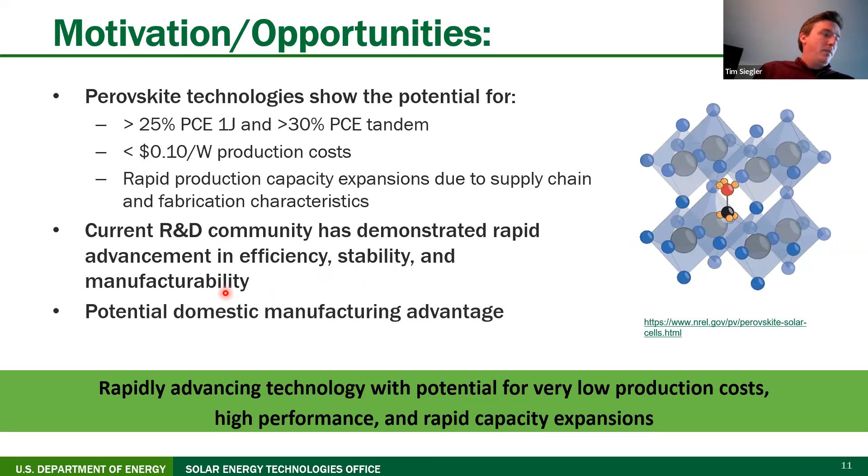There has been a lot of work to drive up efficiency to very high levels and demonstrate a high headspace there. There's been a lot of good work showing that while stability is a concern, there's a lot of levers you can pull to enhance stability and to enable high throughput manufacturing with a potential domestic manufacturing advantage.

SETO observes that there are 3 major categories of perovskite technologies that are currently being explored for commercialization in the startup communities and in various for-profits. A single junction, which is a standard PV with a single perovskite absorber, which has potential for the lowest dollar per watt costs of any of these 3, and a current record of, again, 25 and some change on less than 1/10 of 1 square centimeter. We'll talk about these targets later, but DOE has identified a target of about 18% efficiency on 500 square centimeters.

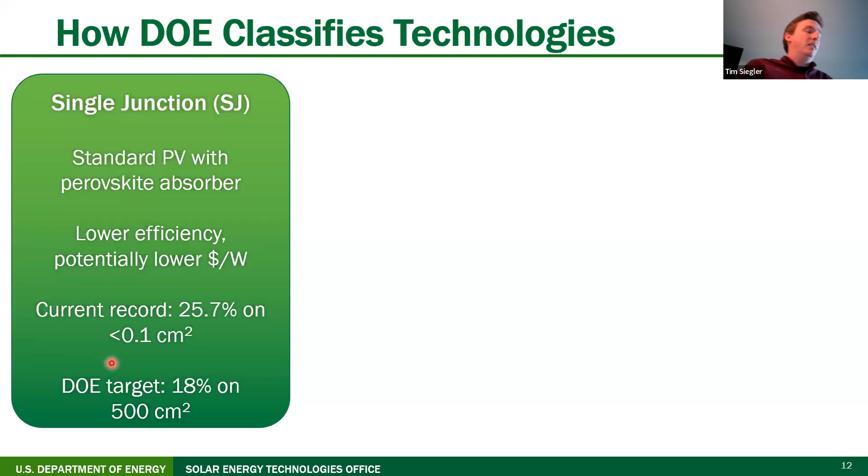Perovskite tandems allow for higher efficiency with the same sort of capex advantages that a single junction device would impose. However, because you are doubling up the number of absorber layers and have to double much of your capex equipment, we have a higher target of 24% on 500 square centimeters, with the current record of about 28% reported in Martin Green's tables for less than 1/10 of 1 centimeter squared.

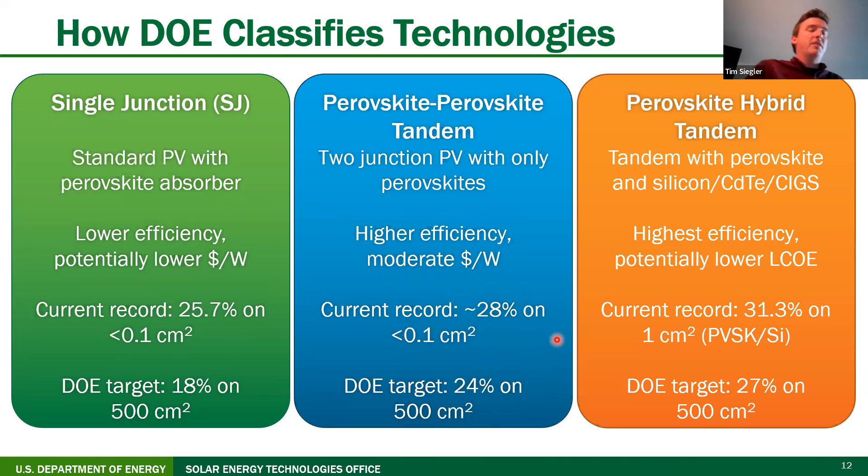And then perovskite hybrid tandems are tandems that employ perovskites in concert with silicon, CdTe, or CIGS, which have the potential for the highest efficiency, and currently exhibit the highest record efficiency of over 31% on a larger 1 square centimeter perovskite silicon tandem cell. And DOE has a target of 27% on 500 square centimeters.

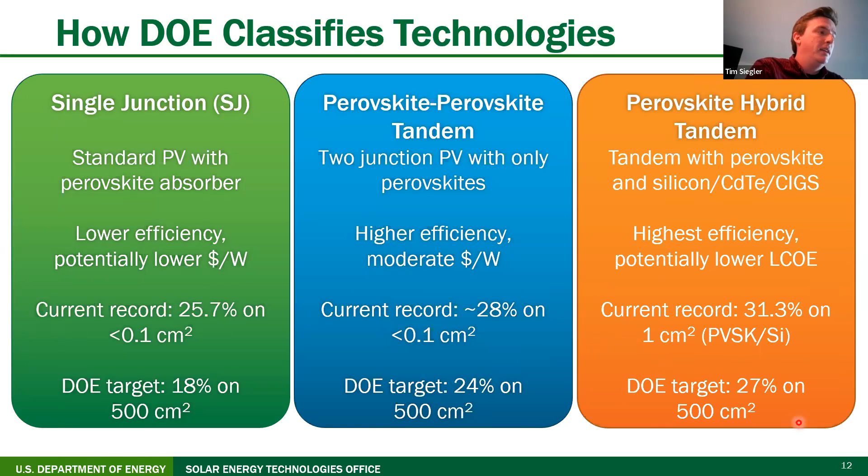And so to discuss what our office thinks about perovskites, we published, again, a perspective letter in ACS Energy Letters. And before we get into the actual details, while there were a lot of things that could be perceived as takeaways for the startup community and for-profits, publishing in an academic journal was intentional, so that the large community of applied researchers, and obviously fundamental research is very important and something that we value, but there's a lot of applied researchers who want the technologies, solutions, or science they're working on to be helpful to decarbonizing the US economy.

And so attempting to create some high-level alignment among academic researchers on these topic areas, and clarifying which questions, at least that DOE perceives, are actually gating for deployment were some of the higher level goals of this paper, as well as some stakeholder engagement. Perhaps folks who know SETO very well might not have gotten much new information from the paper itself, but there is a larger community beyond the DOE bubble that we wanted to reach, people that we aren't talking to every quarter in quarterly update meetings, who still could contribute quite a bit to perovskite technologies.

We also valued the feedback from the peer review process. And I think one thing that we didn't anticipate is how much communication, feedback and dialogue we were able to generate. That's been very productive, very useful, and something that we very highly value as a result of this paper.

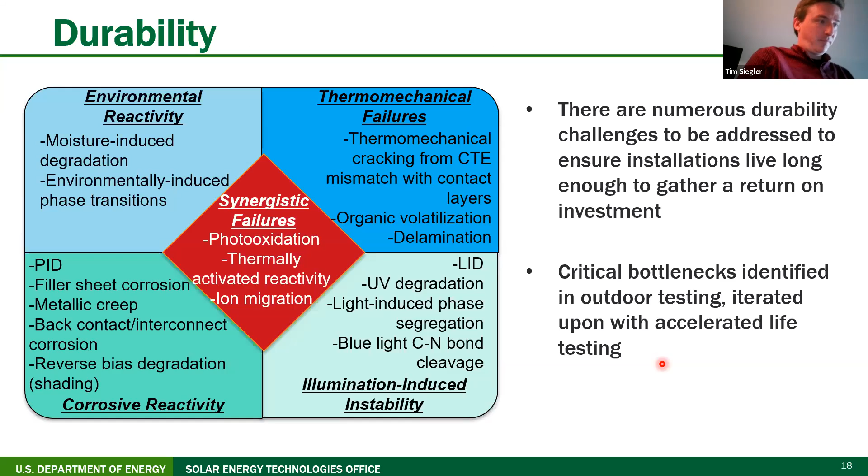As far as efficiency is concerned, I'm working to rebrand efficiency internally as efficiency at scale. I'm speaking as myself here, not as the DOE, but if I don't see that 25.7% record on 0.1 square centimeters broken ever again, I think I'm okay. It's more important that we get to near 25% on larger area devices.

And to kind of level set for the community, silicon cells have a standard cell size of 274. That's what an M6 cell is, if I'm remembering. It's either 274 or 276 square centimeters, and they are actually moving to larger formats. We will see if the market bears that, but nonetheless, this is kind of the orders of magnitude increase in cell size that we're looking at, not to mention modules as well.

And when we look at the cell-to-module efficiency gap, there are obviously scientific problems that may or may not be contributing to this gap in efficiency between small and large area devices. Maybe some of the quote unquote benign defects are actually becoming more apparent at larger area. Perhaps sheet resistances of, let's say, metal transparent conductive oxides that are tolerated at very small area become more problematic when you go to larger area devices and cause a lot of series resistance.

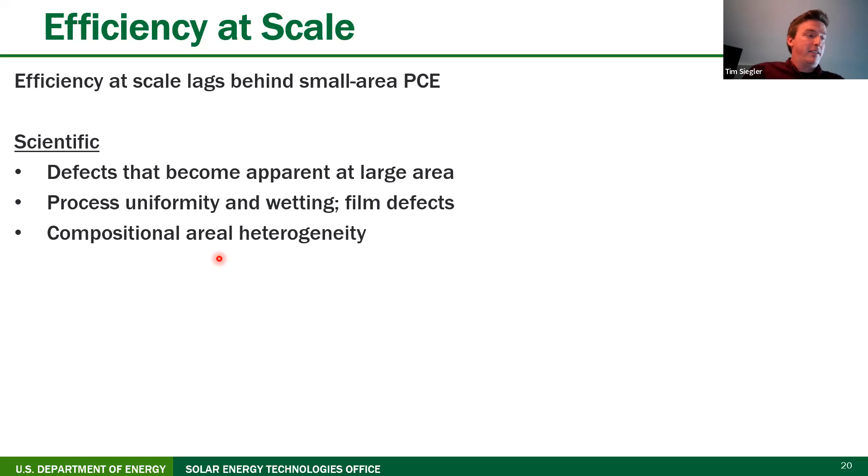And then potential compositional heterogeneity as well. Areal heterogeneity, which means in the XY plane, or at various length scales. It could be millimeter to meter level heterogeneity due to variations in just being suboptimal in your deposition, or it could be on the micron scale or even on the nano scale, depending on whether there's phase segregation, either photo-induced or inherent phase segregation in your perovskite compositions.

But I think it'd be remiss to not discuss some of the systemic issues. A lot of these records are optimized on non-scalable techniques. Even if you want to try to make the argument that spin coating has scalability potential, the way that you do solvent anti-solvent engineering in a lab is probably not going to be useful on substrates that are larger than, let's say, 2 inch by 2 inch, maybe being generous 5 inch by 5 inch, but probably 2 inch by 2 inch is about as large as you can get, doing specific anti-solvent dripping in the center of a spinning sample and getting the fluid dynamics such that it perfectly and consistently makes uniform thin films.

This is something that's being solved in real time. And so this is not as big of an issue as maybe it would be 2-3 years ago. But academic breakthroughs often aren't tested on larger areas, or perhaps 1 square centimeter is defined as a larger area. And again, thinking about the competition, the other technologies in this space, CdTe and silicon, they're in the 100s of square centimeters cell size. And so the definition of large maybe needs to be explored as well.

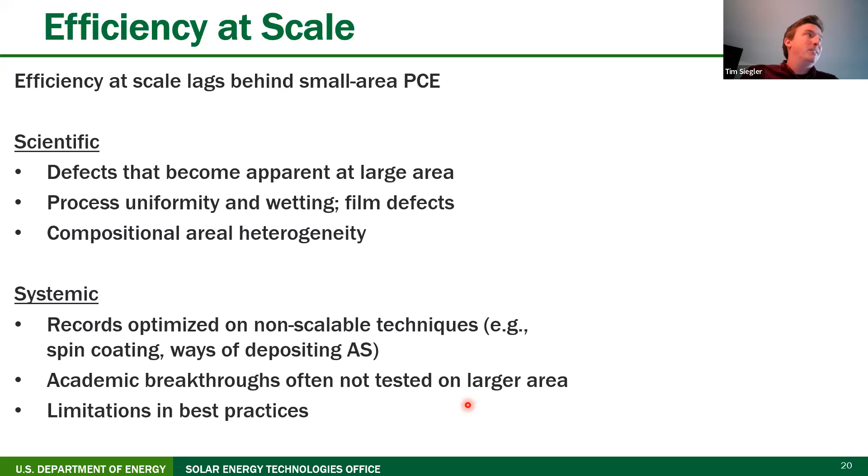And then limitations in best practices as well. Now, this is a very broad catch-all, but I want to just take one example that maybe could be used by academic communities and folks making small area samples to really help test on larger areas. Let's take a standard pinout that many are familiar with, take scale bars such that one of these squares is 0.1 square centimeters in size, and assume a perfect mask where you're just exactly masking the active area with nothing around, like micron level precision.

By doing very small adjustments to your shadow mask and keeping all the pins in the exact same place so you don't have to change anything in your testing equipment, you could utilize this large exclusion zone that's present around all of your devices, and sample much more of your area, right? You or your grad students have done the work to make these films. Let's utilize all of them, and more than double the active area just from a very simple switch without changing any of the processing at all.

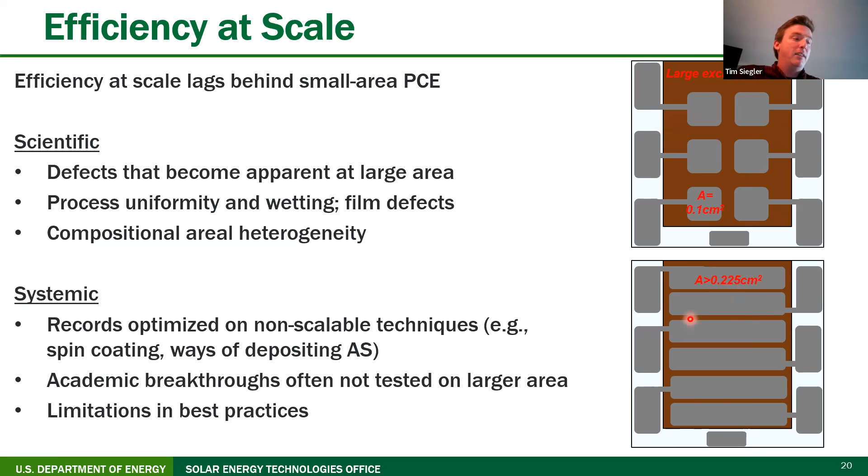Moving on to manufacturing, obviously the processes themselves are important in optimizing those, but there's also a lot of manufacturing considerations related to quality control, process uniformity, repeatability, throughput, making sure you have inline metrology, and doing supply chain development as well. I'm going to focus on process control and process insensitivity, which is, I think, very important, right? Because to enable the low costs of perovskite manufacturing that would help with SETO's ultimate goals, low capex is the promise that perovskites may be able to achieve one day. But tighter control windows add cost. And so process insensitivity helps to maintain headspace for cheaper manufacturing of perovskites.

And I think to call out a number of different things that may require process insensitivity. Precursor ratios and concentrations, whether that's in a solid or an ink, are important. I'm thinking of, I believe it was Jana Vanzov's work on lead acetate to methylammonium iodide ratios for that specific anti-solvent-free composition, and how tiny fluctuations there yielded dramatic differences in PCE values. And so processes that require such tight controls might have a very high failure rate for modules and not be particularly attractive for high volume manufacturing.

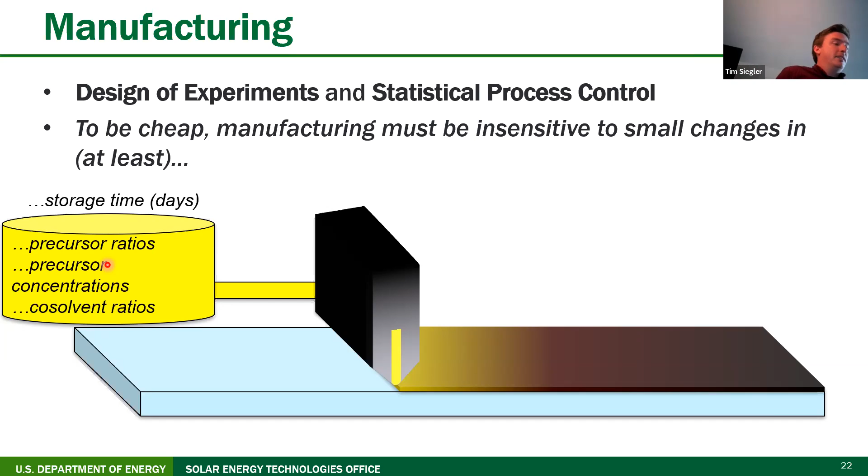Storage time on the order of days in case there's a line stoppage, or even just trying to mix or get a lot of material prepared at one time. If you have to continually throw away inks or solids and replace them, that's a yield loss in and of itself. That has nothing to do with the deposition. So being able to store your materials for a few days is important to make sure that you keep yields high and by extension costs low.

Similarly, handling time in the course of hours, so you don't have to continually flush out your lines or throw away material when, again, there's a line stoppage or something unexpected happens, which would impact yield as well and create extra hassle and time on the manufacturing line as you handle that specific fire and need more time to do that. Ambient temperature and environmental conditions as well.

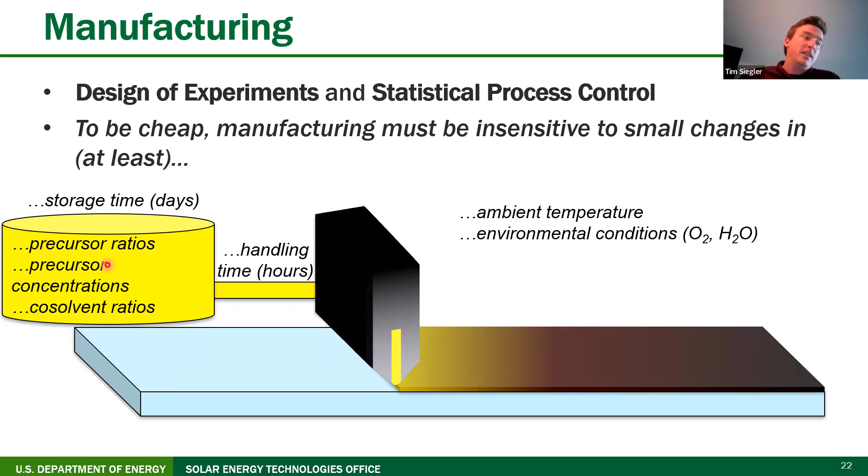Being able to produce solar cells with the same efficiency on the hottest, most humid day of the summer versus the coldest day of winter, and getting the same performance regardless. That's obviously very important when you're trying to do gigawatts of throughput every single year. And then various different deposition parameters as well: feed or vapor pressure, contact layer heterogeneities, line speed, and substrate temperature.

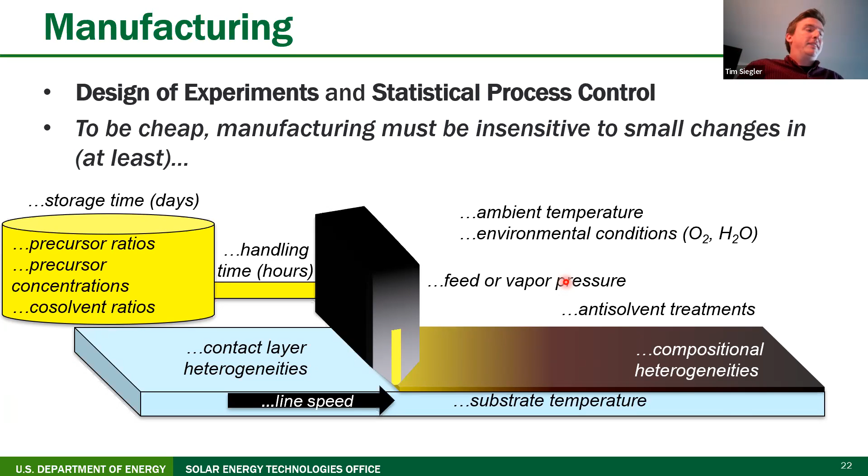Being able to employ design of experiments and statistical process control to verify small changes in all of these is very, very important, so that there's statistical power behind claims of process sensitivity or insensitivity. And finally, anti-solvent treatments and compositional heterogeneities downline. If there's tolerance to that, that helps with yield and performance as well.

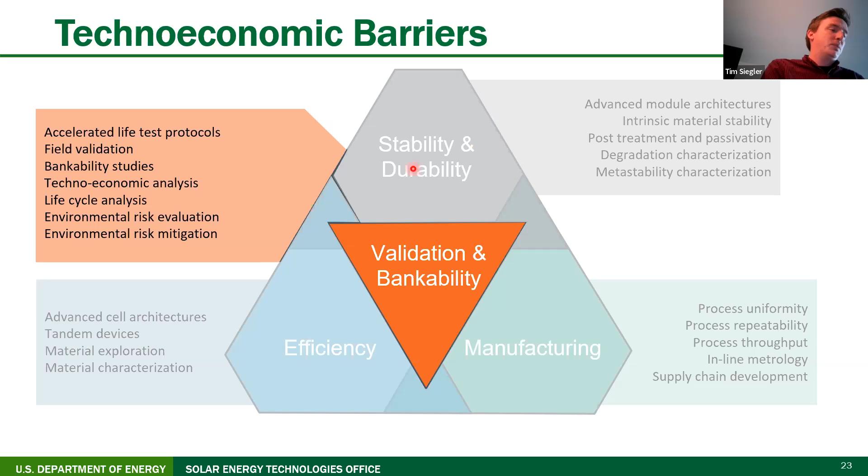Finally, validation and bankability is the last part of this sort of conceptual diagram. And bankability is a thorny question, right? I'm frequently asked, what is bankability? And so I go to some of my colleagues who have spent decades in the industry and with First Solar, et cetera, and ask them what bankability is, and they tell me it's a thorny question. So I will try my best here to help you figure out what bankability necessarily means.

I think at its base level, if I had to come up with a one-sentence definition, from my understanding, it's the ability to secure investor financing with reasonable interest rates. Now, I think there's two ways of thinking about bankability that folks in this audience would be considering. I think there's business bankability, right? How bankable are you as an investment to venture capital, to various investors that want to put money into your organization? But from SETO's perspective, we are looking at end use and deployment.

And so I'm going to be presenting bankability from a project finance perspective, where you'd want bankability of the project that you are deploying, and what the folks who are putting money behind a utility scale field with perovskite panels, or maybe even just a consumer who's trying to put a perovskite solar array on their house, would be potentially thinking about, or what the insurance agencies they'd be leaning on for support would be thinking about.